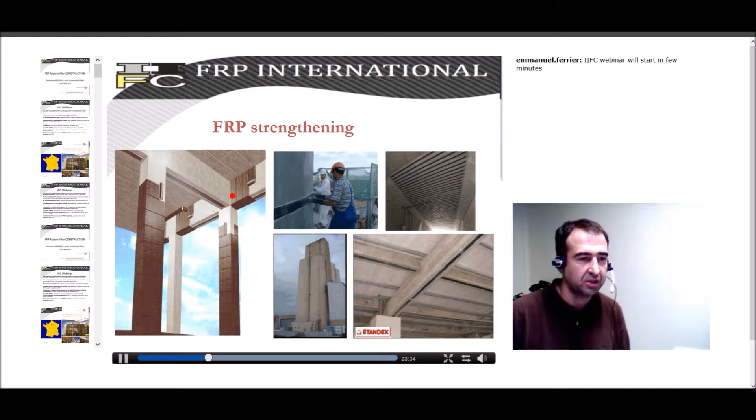So to start with FRP, I think we have a small community today. You are all aware about FRP systems used for shear strengthening, flexural strengthening, confinement. These materials are well known in the field of construction nowadays, essentially to protect old structures or to upgrade structures that need new strengthening because of overloading. It can also be used to solve some problems about design mistakes, for example. And for seismic applications, there is also good application to make structures more safe.

In France, for example, we have had some interesting developments about dynamic loading on bridge piers that are impacted by big heavy trucks, and a lot of piers have been strengthened by FRP to avoid the collapse of the bridge, quite successfully.

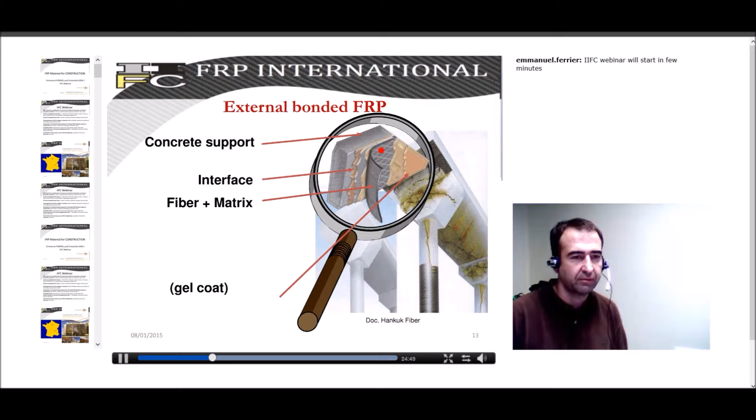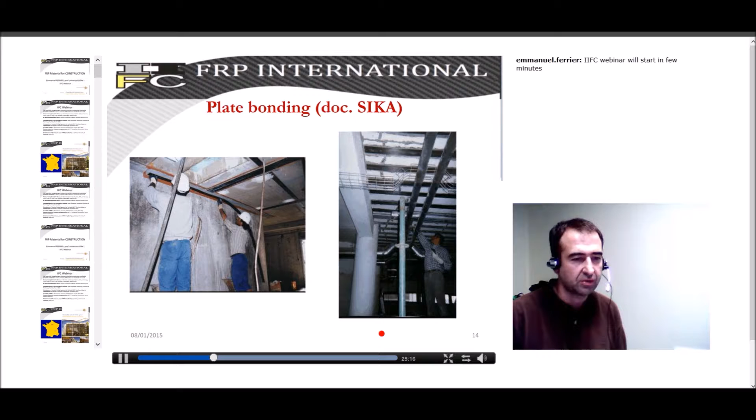So generally when we use FRP, it's unidirectional fibers bonded onto a support using a polymer, but I think you are aware of this. This technique is well used in a lot of countries, and in France there are about 7 to 8 companies that apply about 50,000 square meters of carbon fibers each year, essentially in buildings and a few applications also on large dams and bridges. We have some photos about this kind of application, some large machines to apply the polymer, and so on. So this is just an example from France.

So about FRP materials, I will try to go quickly on this part because there are not so many people connected.

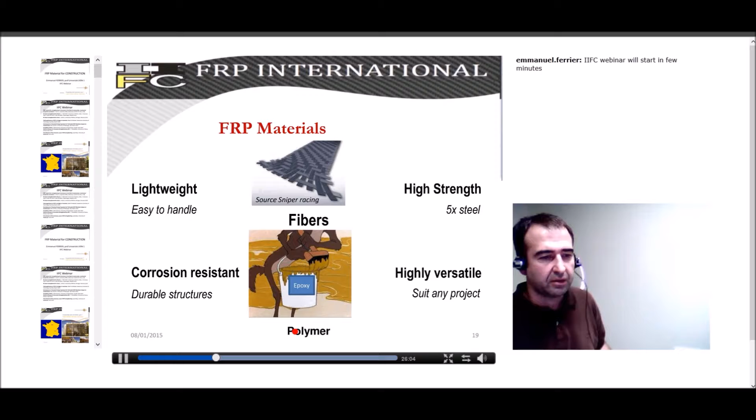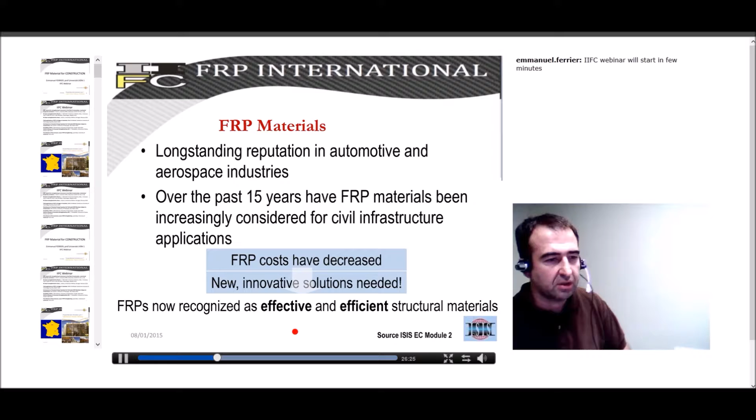You all know that FRP materials are light, high strength, corrosion resistant, and can be used nearly on all surfaces. That makes this material very useful in the field of concrete structures. These materials are well known in other industries, such as automotive and aerospace, and the development of this material has increased each year for about 15 to 20 years, and now it's quite common in construction.

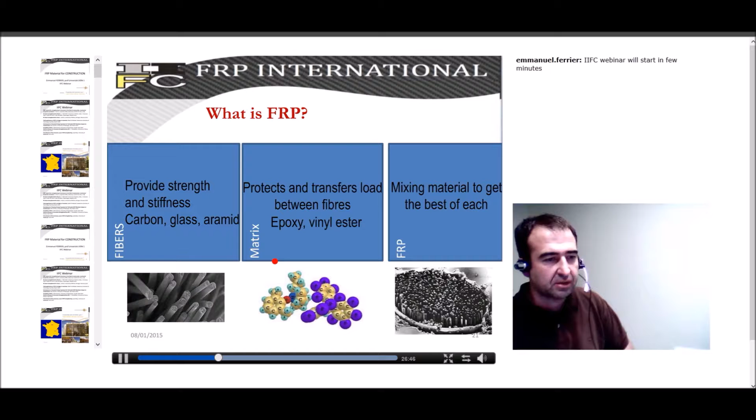FRP material is made of fibers, mainly carbon, because people started with these fibers, but also glass and a few examples with aramid fibers. The matrix is essentially epoxy, and the material you get has a lot of small fibers that play the same role as steel rebars, but with lighter properties.

So about the fibers, you may be well aware that high modulus or high strength carbon fibers are commonly used. Generally, if we compare this to steel properties, the main issue is that we have higher tensile strength but lower Young's modulus. For this reason, the first fibers commonly used were low modulus carbon fibers.

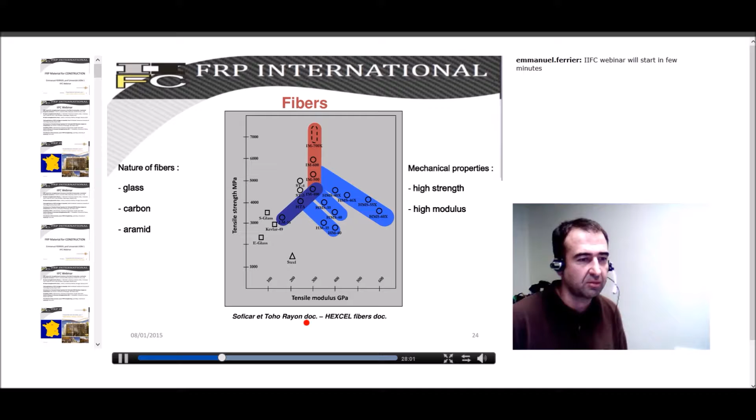Nowadays, for some specific applications, e-glass, even though its Young's modulus is lower than steel, seems to be quite good to dissipate more energy, and we'll see this in some large applications about seismic retrofitting, for example.

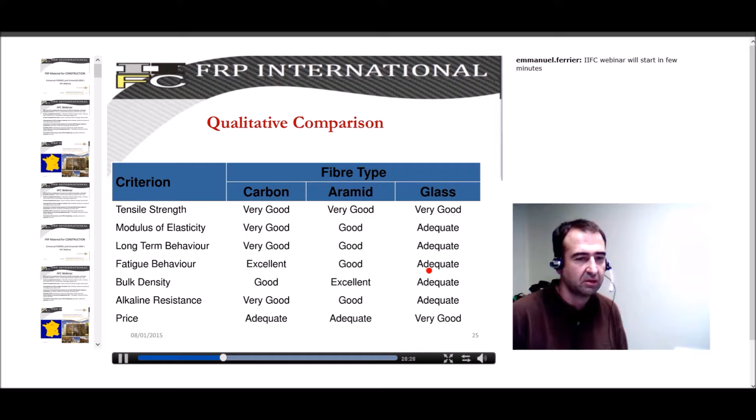If we look at these three kinds of fibers - carbon, aramid, and glass - carbon has very good properties for all the mechanical and physical properties we may look at. Glass is also good, but the problem is the low Young's modulus of this material, and the long term creep sensitivity and fatigue, which is less effective than carbon.

So about the polymer we use - polymer is a specific material well known in the chemistry industry, but generally in our field it's less known. A lot of misunderstanding happens because polymer needs to be handled very carefully and specifically. There is a polymerization process that should be clearly understood. It's like concrete - we need some days, specific temperature, and specific humidity to get the perfect chemical reaction and get the good material at the end.

The main typical property people need to understand is the temperature sensitivity of this material. If we compare this to concrete, we know that concrete is fully strong and fully hard once we mix cement and water, and the mechanical properties don't really depend on temperature. In this specific case, temperature changes the mechanical properties of the polymer.

You have a range of temperature where the polymer is thermoset, with a glassy plateau where the mechanical properties, essentially Young's modulus, are constant. Then there is a decrease, down to the rubbery plateau where the properties still exist but are very low, much lower than the initial one.

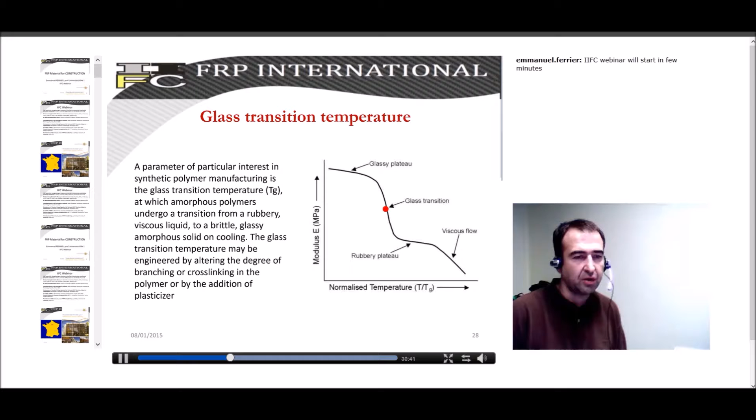This may be compared to the material used, for example, to build a road - material coming from the petroleum industry - and it behaves in different ways depending on the temperature. So we identify a value which is the glass transition temperature of the polymer, corresponding to the value where the mechanical properties decrease.

So a common thermoset polymer used in our industry is epoxy, used for wet layup applications of laminates and dry fibers. It's a very good material for adhesion and bonding. We'll see this in the second part.

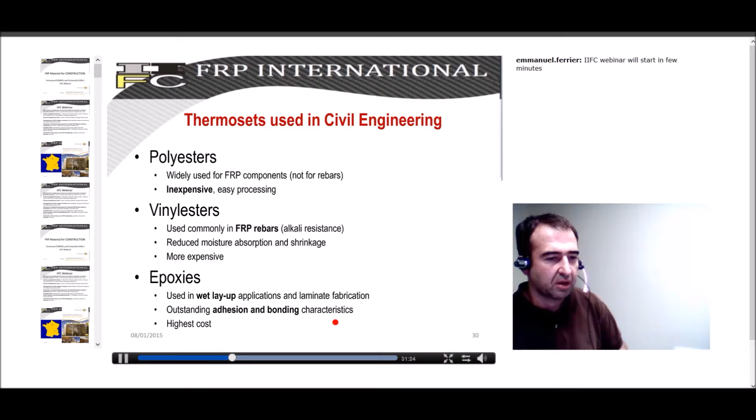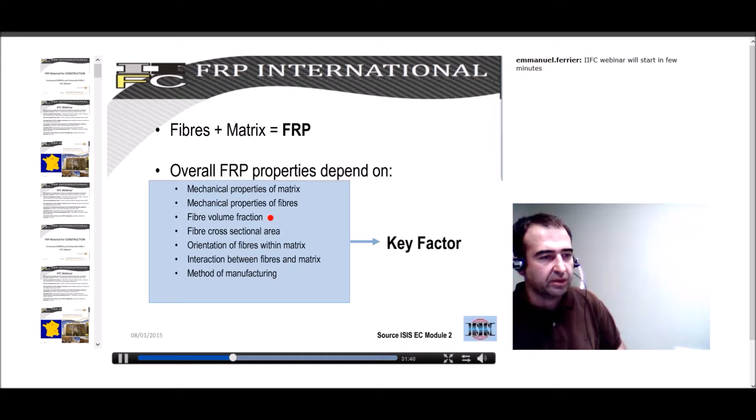So FRP is a mix of fibers and matrix, and the mechanical properties of FRP will depend on the matrix, as I mentioned, on the fibers, but also on the amount of fibers in the mix and the adhesion. So if we look at the mechanical properties, you have to understand that the mechanical properties of UD fibers are given, and you can have very good properties of fibers.

Then you will have two things to understand - the fibers are bound together, so there's the problem of physical and chemistry properties of the surface and the interface between the fibers and the polymer. And then you have the laminate, meaning you will have a lot of layers, and all those layers have to bond together perfectly.

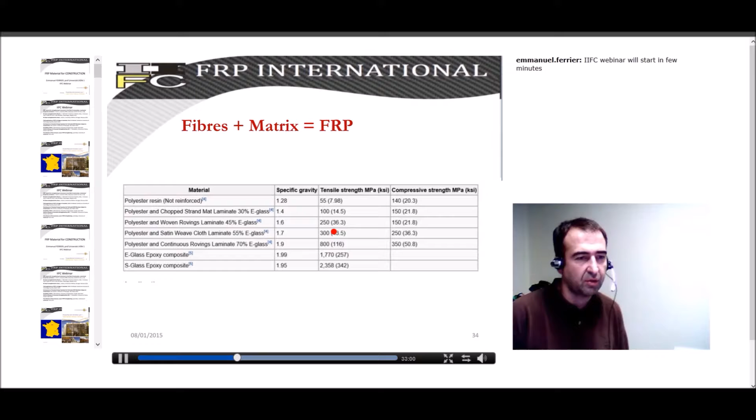If we go to the mechanical properties of the resin, you can observe that generally the laminates and the mechanical properties of the FRPs essentially depend on the mechanical properties of the fibers themselves. It means that polymers are just there to make sure that all the fibers are bound together and that all the fibers work at the same time in tension.

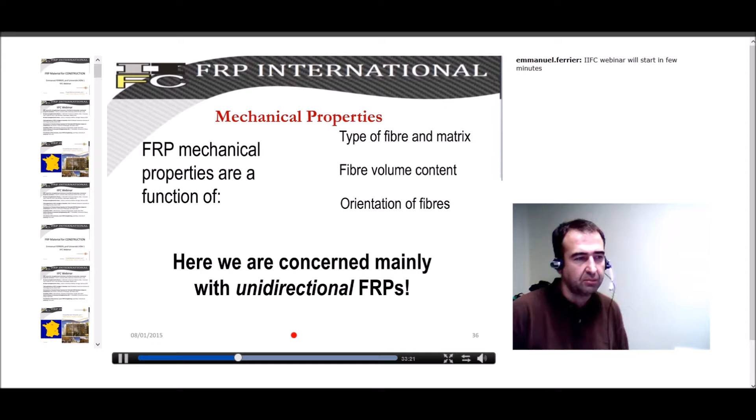So those materials are applied by the wet layup method. Dry fibers are bound onto the substrate, and an epoxy polymer is used to impregnate the fibers. It can also be bound using polymers.

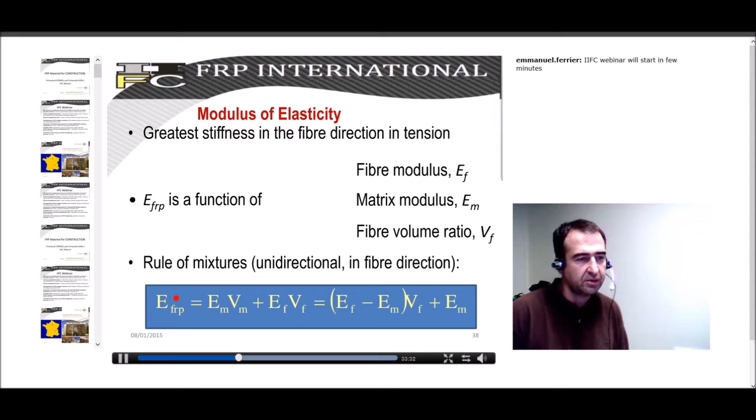About properties, as I mentioned, the Young modulus can be easily calculated using mixture properties. It means that your final properties will depend on the matrix properties and the fiber properties. If we compare the Young modulus of the matrix and the fibers, even if we have 70% of the FRP made of matrix, the mechanical properties will essentially depend on this ratio. Carbon, for example, has a Young modulus nearby 200,000 megapascal, compared to a usual epoxy which is only 3,000 megapascal, so the difference is nearby 100. So the mechanical properties of your FRP will depend on this value. If your ratio is very low, your final properties will be very low.

When we have this, generally we identify the mechanical properties using perfect bonding between the fibers and the matrix. This is not often the case, so there is some problem in certain cases between matrix and fibers. This is well known and identified, and it's quite common now to get a very specific treatment of the fibers so that there is very perfect bonding between these two, allowing mechanical properties to be calculated considering usual elastic properties of all the constituents.

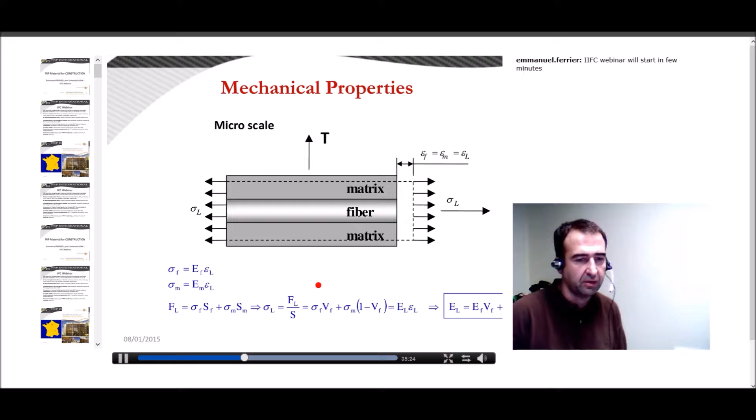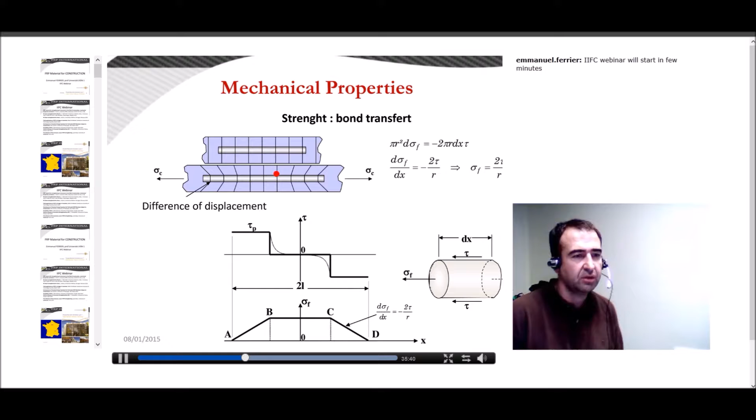Then about shear: when a fiber is fully impregnated by the matrix, there will be a bond issue between fibers, and there is a strength property to identify, which is the shear strength that can be developed around fibers to make sure that two layers will be fully bonded.

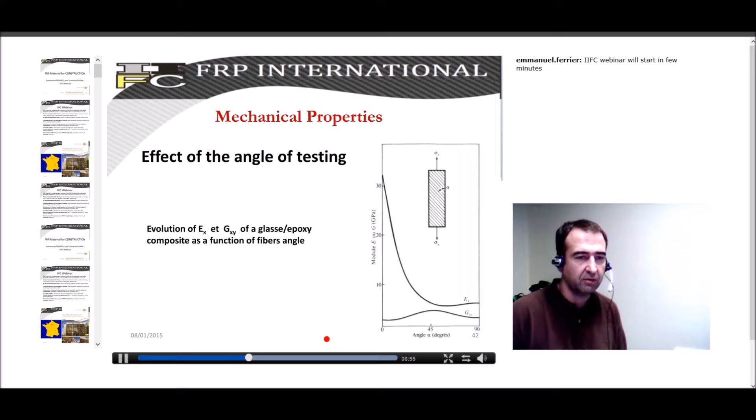Another thing well known in this field is that when we use unidirectional FRP material and test it in another direction, we rapidly lose the mechanical strength even for a very low angle. The decrease in Young modulus or strength is very high, so this material should only be used in its own direction and not in another direction, which can be a problem mainly for a full FRP system. But in case of strengthening, generally the fibers are bound in the direction where the force is applied.

To sum up the mechanical properties, here is the stress-strain relation in tension of fibers and matrix - I mentioned there is a big difference. If you clearly observe, the FRP material will have final properties that depend on the amount of fibers and matrix you put in, as well as the initial properties of both.

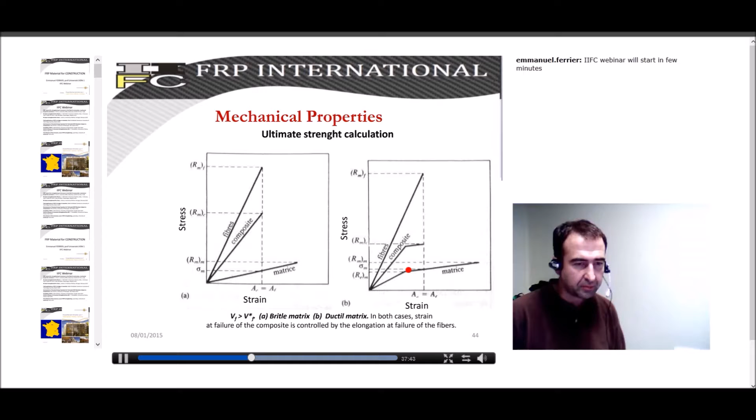For nonlinear behavior, some development has been done in this field recently. This can be obtained depending on the matrix properties, but also on mixing fibers with different behavior.

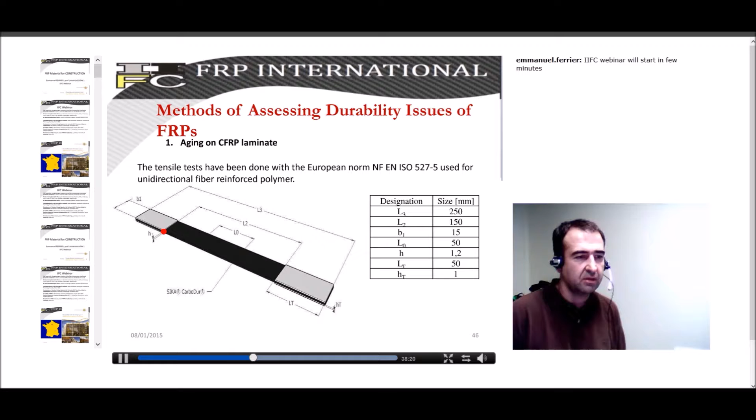For testing material in our field in construction, it's quite well identified now. Generally everybody uses the ISO norm for tensile testing. There is also an ASTM standard, which is a little bit different in sizing but quite similar in principle. Coupons are made of unidirectional material, and then it is tested directly in tension.

Some people ask about the durability issue of these materials, and this is a result coming from our lab testing. We got questions about FRP durability from the French nuclear agency, EDF, who were wondering about using this material for strengthening big buildings and chimneys in nuclear power stations. They asked us to make some tests under quite difficult weather conditions.

At first there is full water immersion during 30 minutes, then freezing at about -20 degrees for an hour, then heating to 60 Celsius degrees, then UV exposure, then rain again, cold, heating with moisture, dry heating, repeated for 300 cycles. This is, I think, the only norm I found about accelerated testing of material. It is commonly used to test painting material, and we have used this for several FRP materials.

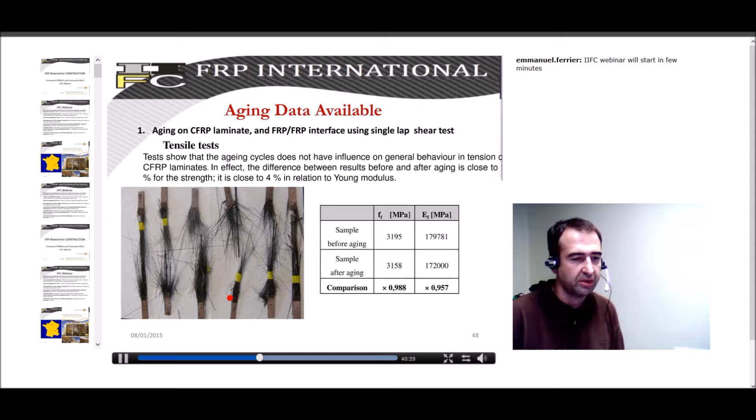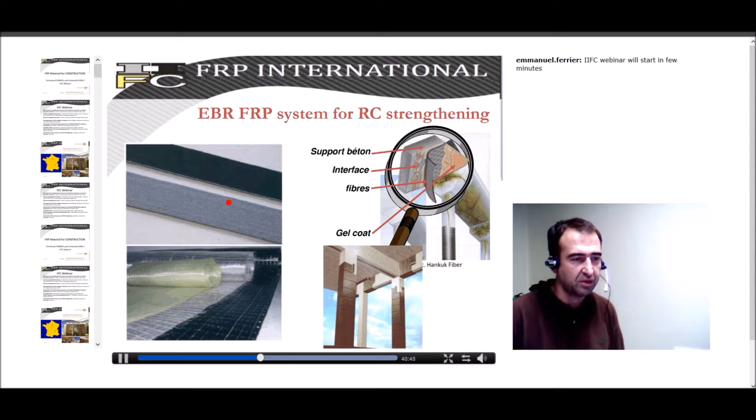What we found is that if we compare the ultimate strength and the ultimate Young modulus, we didn't find any modifications on the coupons we tested in the lab. We made about 100 tests and didn't notice any difference between before and after the aging, and the aging conditions were quite difficult. Brahim Benmokrane will introduce some durability issues about this, and we are quite confident on the durability of the FRP itself. But as I mentioned, this material is bonded onto a support, and generally it can be bonded with two types of material: laminate material, prefabricated, or different sheets directly bonded onto the support.

So now the issue is not only to test the material, but to evaluate how it behaves depending on the way the material is applied on the support, the way the worker applies this material, and the weather conditions. We are worrying about how to identify the mechanical properties of the FRP onto the concrete.

This is the next step of my presentation, about the bond issue. Bond is important for a beam because when you strengthen a beam with FRP for flexure, this can only work if perfect bond adhesion between the FRP system and reinforced concrete is assumed. That means you have continuity of strain between the steel and the FRP. Another important issue is that at the end of the FRP system there should be no debonding, because even if perfect bonding can be assumed in the current part, if there is debonding of the laminate the system won't work anymore. So the bond issue onto the concrete substrate is very important.

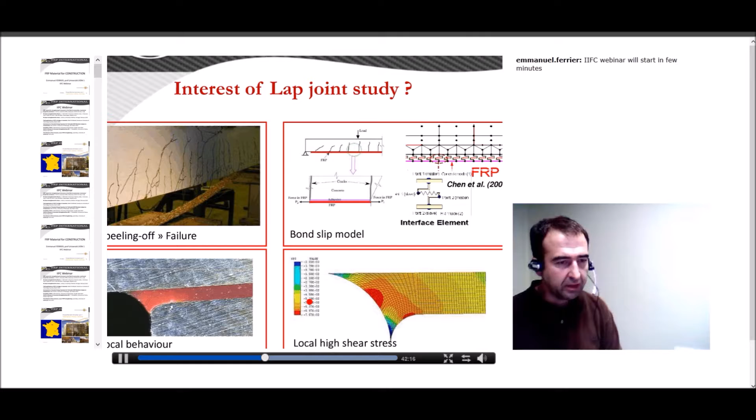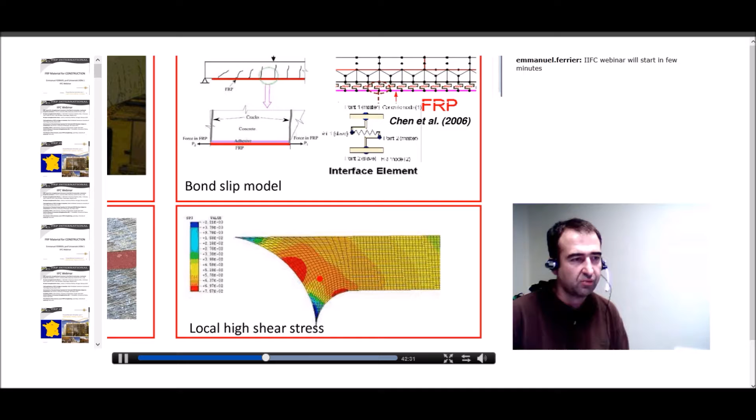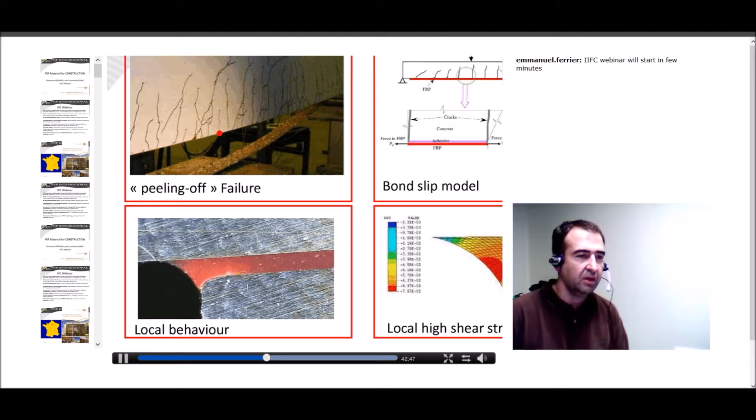There has been a lot of development about this. This comes from the aeronautic industry and mechanical research - we know that at the end of a lap joint there is important stress, essentially because we have two different materials bonded together with different mechanical properties. This image shows that shear is the main issue and the main problem, and this shear, generally in reinforced concrete beams, is known to cause full delamination or peeling off of the structures.

In order to identify this, there has been a lot of development and modeling to try to understand how this interface behaves and to identify its mechanical properties. This is the next step of my presentation - I will try to show you how researchers have tried to find and identify the mechanical properties of this interface.

Since 1992, the first research developed a compressive shear test. This test has completely disappeared - we don't find it anymore. There is also a single lap shear test, which is quite commonly used, but it's difficult to apply in certain cases because you can have flexural behavior, and the mechanical properties are difficult to obtain.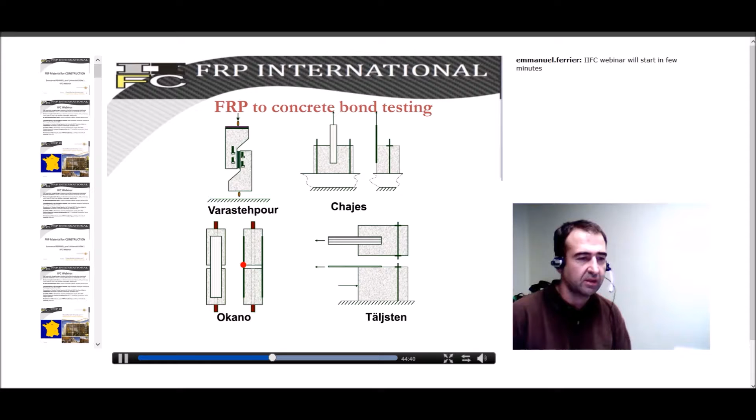Another common test is the double lap shear test. Two concrete blocks are connected by FRP material. Then tensile stress is applied onto the concrete, and due to the tensile force developed in the FRP, you get shear developing in the interface. The first authors to use this test were Okano in 1995 - quite a long time ago - and this kind of test has been fully used by other authors since.

If you look at the results obtained with this kind of test, you have the average shear stress developed all along the bonding length, and here the strain in the FRP. As you observe, there is quite a linear behavior, then debonding starts, and full failure is obtained.

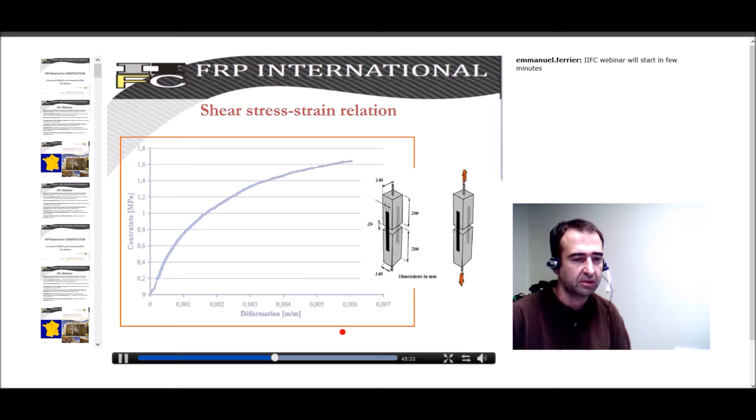Going back to the literature review, the first tests reported in papers were from Täljsten in 1997. This was the single lap shear test I mentioned, and the test was developed for FRP bonding but also for steel bonding, since at that time steel plates were still used for reinforced concrete strengthening.

If we bond strain gauges onto the surface and follow how the force is transferred from FRP to concrete, this author showed - and this is now quite commonly known - that depending on the level of load applied, you get a transfer length which is quite short. You can observe that nearby 100 to 200 millimeters is enough to transfer the full stress from the FRP to the concrete. This graph shows that at the beginning of the lap joint there is important strain, which decreases as the stress is transferred to the concrete support, becoming nil at the end.

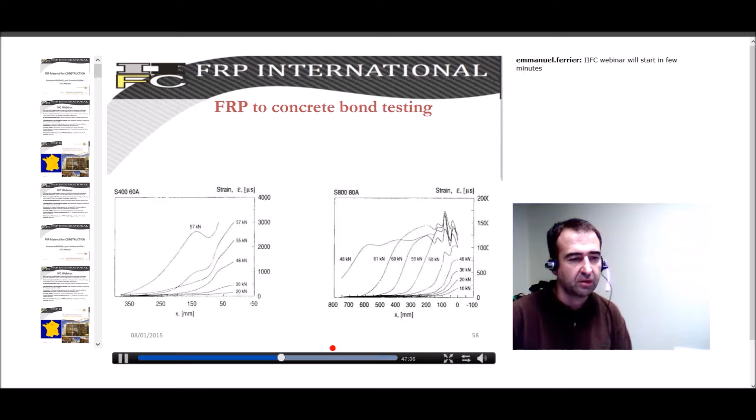You can observe the author captured debonding here, where full stress was developed and this zone is debonded, leading to failure. But in the elastic stage, the bonding length is not so long - we only need 100 to 200 millimeters to bond this material onto the support. This is mainly due to shear transfer.

There are also some old studies done mainly in the field of aeronautics, with authors like Volkersen or Hart-Smith.

Using a basic equation, shear is due to the difference of displacement between two materials, steel and concrete, for example, and the angle of rotation is commonly known as the shear strain. You can write these equations and equilibrium between two sections, and this allows you to calculate the shear stress depending on the length.

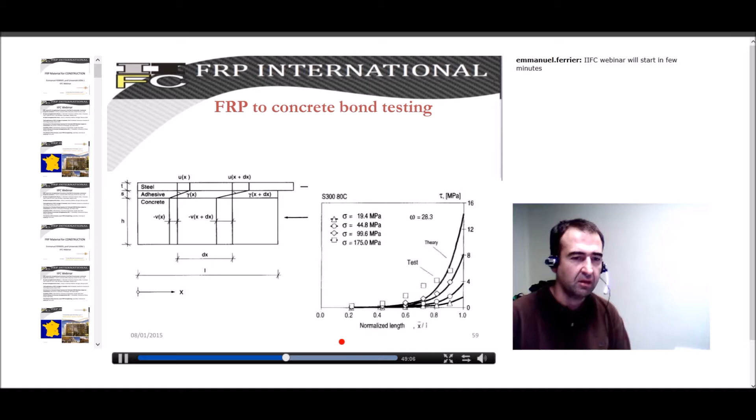If you do this calculation and compare it to the strain, it's very well developed in the field, in the paper from Täljsten. You can observe a very important shear stress decrease over just a few centimeters of bonding. This is also a problem because locally you have peak stress, important stress that can create specific mechanical disorder leading to failure.

This work done by Hart-Smith was developed further by Täljsten for the concrete FRP problem. Bizindavyi also worked on it, and a lot of specific equations have been developed on this topic. You can find them in the literature review quite easily.

More recently, other authors worked on very local bond slip mechanical laws. All these authors have shown that if you focus your study on the peak stress area, you can show, based on experimental study, that the bond stress against slip follows this kind of nonlinear law, with a decrease corresponding to the beginning of debonding.

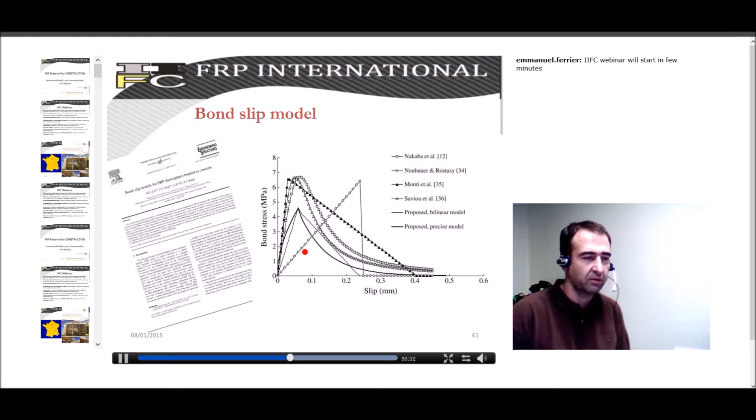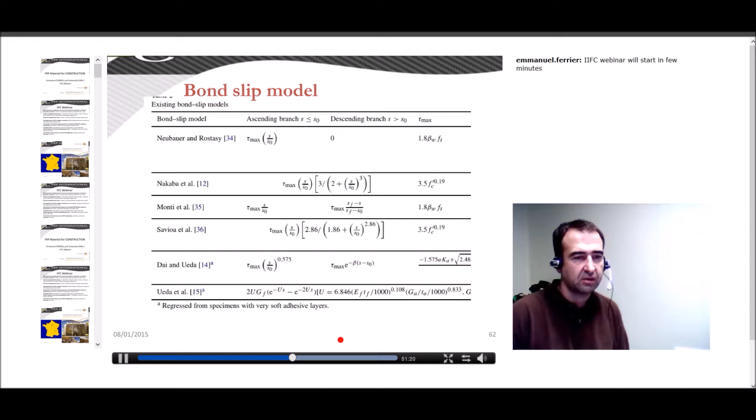Depending on the authors, you will find several proposals, and I've summed this up in this paper. This paper sums up all the equations proposed by different authors, and they have clearly observed that the maximal value can depend on the concrete strength. Based on this, they have proposed mechanical relations to calculate the ultimate load needed to design such bonding properties.

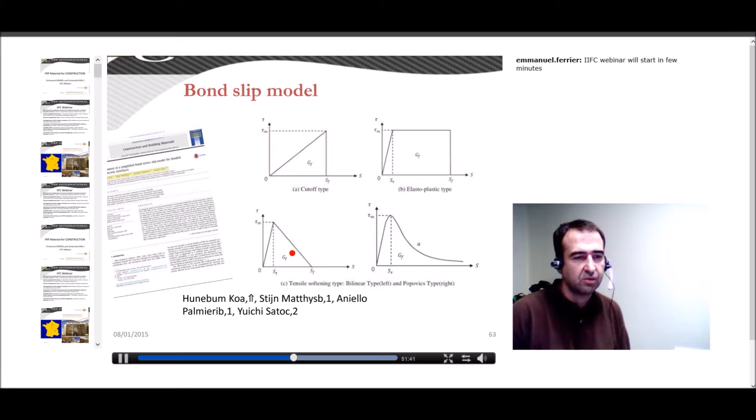So depending on the design, there are several mechanical laws. Generally this value is correctly assumed, and the G factor is also proposed in several papers, so that you have some bond slip model that can be used afterward.

A comparison has been done by Stijn Matthys and Aniello. This study is very interesting because it compares a lot of tests. If you need to develop bonding issues, I recommend reading this paper, as it has many results from the literature, comparing calculated ultimate values to experimental ones, clearly showing the calibrated models are quite good, depending on the test and the fitting you get.

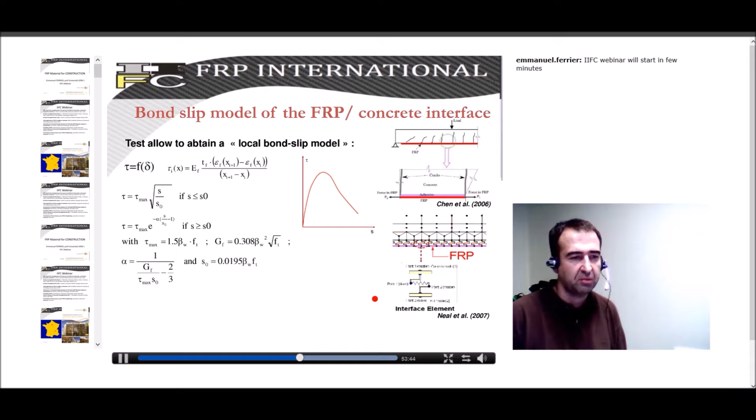Then, using these properties, Shalal and Chen, also Kenneth Neal at the University of Sherbrooke, tried to use this kind of local bond slip model in structural analysis. For FRP interface behavior, you need specific interface relations, and the calibrated relations from the literature have been used to investigate whether this bonding issue can be modeled at the structural level to capture the problem of failure, which is important for beam strengthening. Both of these papers are very interesting.

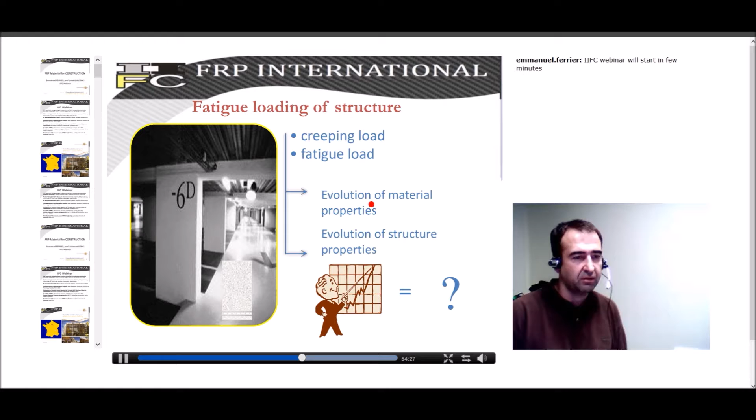So now we've seen that under static load, this bonding problem is quite well identified. There have also been many studies on creep behavior and fatigue issues. When you strengthen a building, such as a parking slab, there will be creeping load and also fatigue load due to cars. The main problem for engineers is the evolution of material properties, and whether the evolution of bonding will affect the structural behavior.

So, for example, I did this work during my PhD some years ago. We tested concrete blocks in shear for 1 million cycles. The fatigue load was applied between 50% and 10% of the failure load for 1 million cycles. This test is the double lap shear test that I described before.

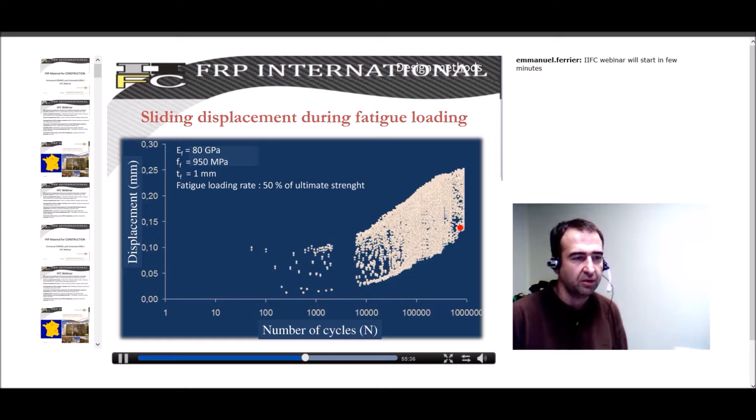You can observe the results here. Depending on the level of strength, there is quite slight, no real evolution of the mechanical properties up to 10,000 cycles, then there is a slight increase of the slip. The slip keeps increasing, but even so, we didn't get failure of the concrete. When the test was done after 1 million cycles, we then applied the static loading. This picture is quite old.

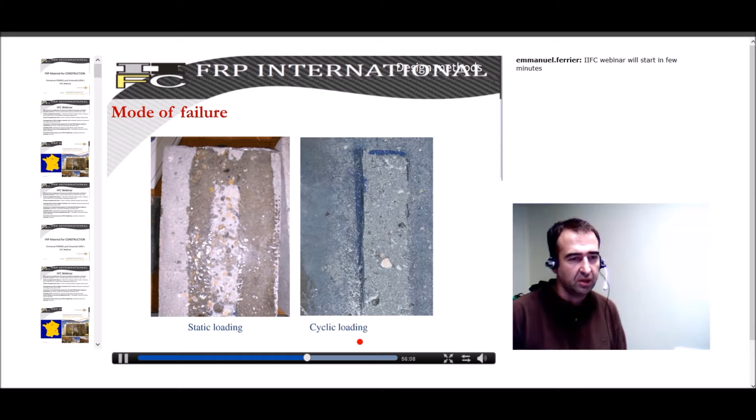What we observe is that we have some decrease in properties in the adhesive because the failure modes change between a cohesive and a non-cohesive failure. This was very interesting for us to see the mechanical decrease and the fatigue.

Since then, there have been other studies done. I can mention, for example, this one from 2008, on fatigue behavior of blocks connected by an anchorage system. This is clearly a very interesting paper because they tested several systems: only bonded system, small anchor system, mesh, fibrous anchors, and also bond straps onto the surface.

Those authors tested all these configurations and also observed an increase in the slip, as I mentioned first, and they also saw that there is a slight decrease.

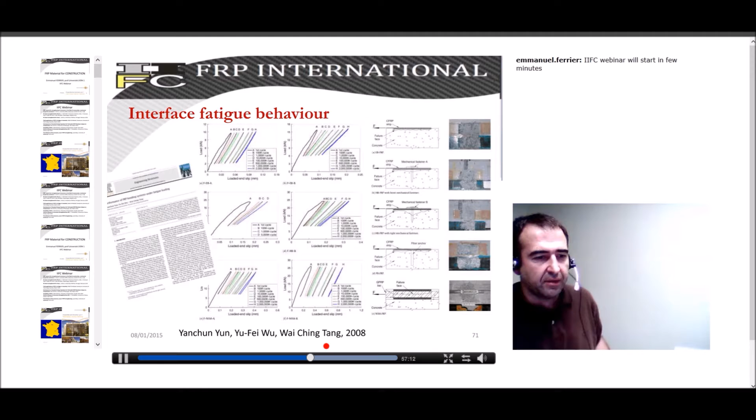So this study is also very interesting if you are interested in the fatigue behavior of the adhesive. At the end, when fatigue is concerned, what we are interested in is getting the ultimate stress strength of the material depending on the number of cycles. For designers and engineers, this value is interesting to know what the limit of stress should be on the FRP to avoid any fatigue debonding.

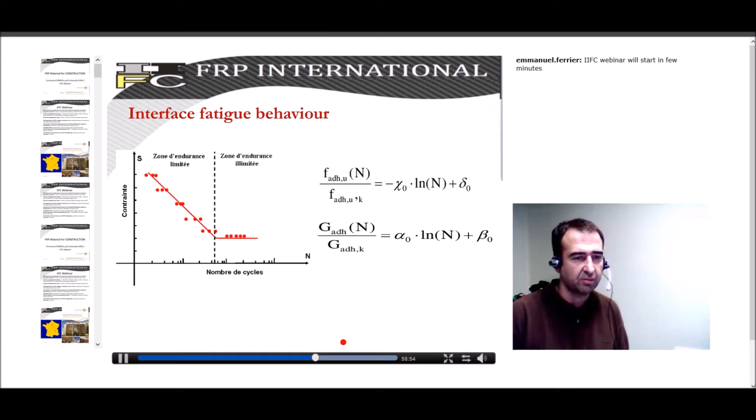In literature, you have some equations such as this one, like Wöhler curves, that propose some constants, of course depending on the process and the system you are studying. There isn't so much, but there is some proposal allowing us to know about the fatigue behavior.

Then the second issue which is interesting to focus on is the creep issue. This was part of my work done during my thesis. At that time, we were interested in getting the full master curve of an adhesive using the time-temperature principle, basically based on the Williams-Landel-Ferry hypothesis.

It is possible to get the full creeping relation using short-term tests with different temperatures. The idea here is that during a short period, a temperature gives you a creeping curve. If you increase the temperature, you will accelerate the creeping problem, and then the creep will increase. When you increase the temperature again, you can get several curves.

Those authors, in the 1950s, showed that it's possible, if you translate all of those single curves, to have the full master curve of a polymer for a reference temperature.

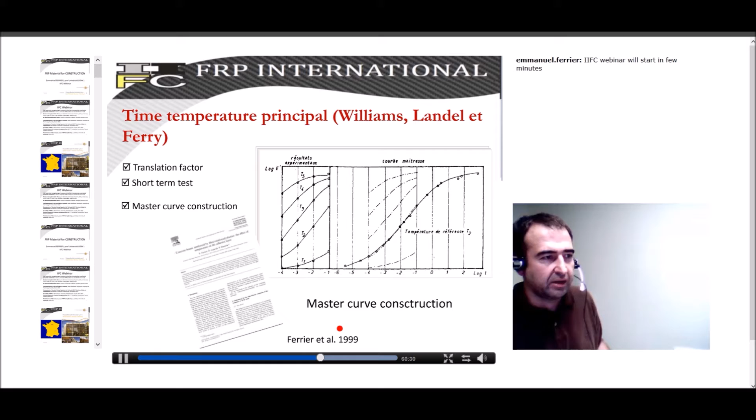So we used this idea on lap joints made of epoxy polymer and carbon fibers. You have here all the shear properties of the adhesive that we obtained from 20 Celsius temperature, then 25, 30, 35, and so on, until we get a real decrease of the mechanical properties.

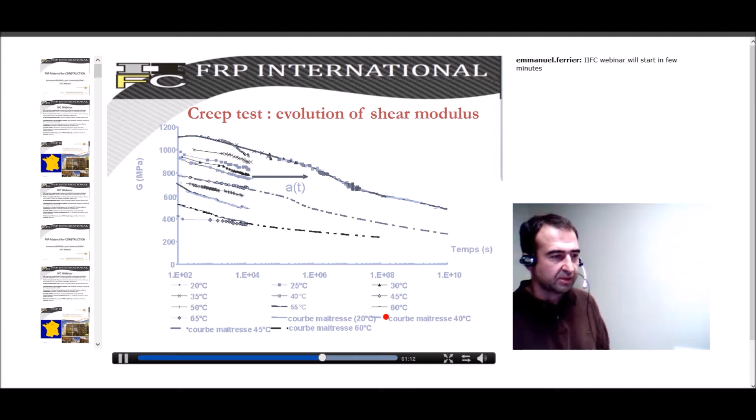Then we translated all of them to get the full evolution of the shear as a function of time. Basically, when you have this, you have the creep function for several temperatures. We compared this with long-term tests, and this has also been published and it works quite well.

What's interesting is that if you use some specific rheological model, you can fit your parameters in comparison with the experimental data we get. Using this, you are able to get the shear strain evolution depending on the initial shear stress and the creep function you have. What we imagine with this is that the creep strain, the shear strain, depends on the instantaneous strain and the creeping one.

It means that if you identify the initial shear strain in the adhesive, if you apply the constant stress, and if you know how this strain will change during time, you are able to fix the maximal value of shear stress you should have in the adhesive to keep your lap joint elastic.

This was the idea to fix an allowable shear strength limit, to get this kind of figures here, depending on time, level of strain, and temperature. You will have the limit in stress you should have in the adhesive, not in the FRP, to avoid nonlinear behavior and keep your adhesive in an elastic stage.

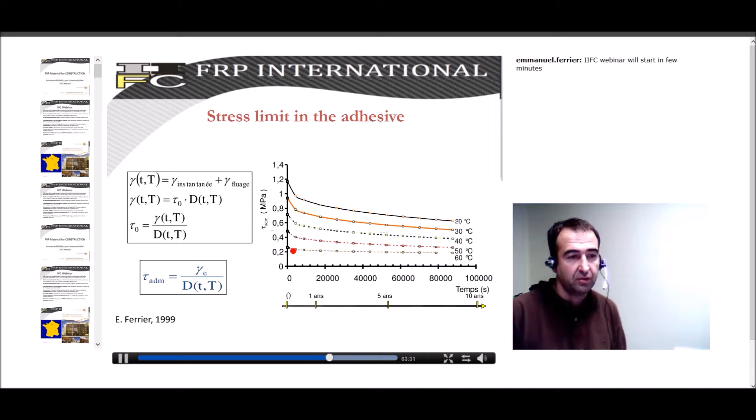If we observe this value, for example at 20 Celsius degrees, our conclusion was that we should limit the serviceability limit stress in the adhesive to 0.7 megapascal, so that we avoid any debonding over a long time period. But if we speak about higher temperatures, you can observe that the limits should be much lower.

What's interesting is that the modeling has been done as I have done, and they have proposed also to try to improve the creeping behavior using nano carbon particles that can be used in several kinds of polymer in the field of aeronautics to improve the creeping behavior. These authors conclude that it can be very interesting to use some new polymer to limit the problem of creep in this adhesive.

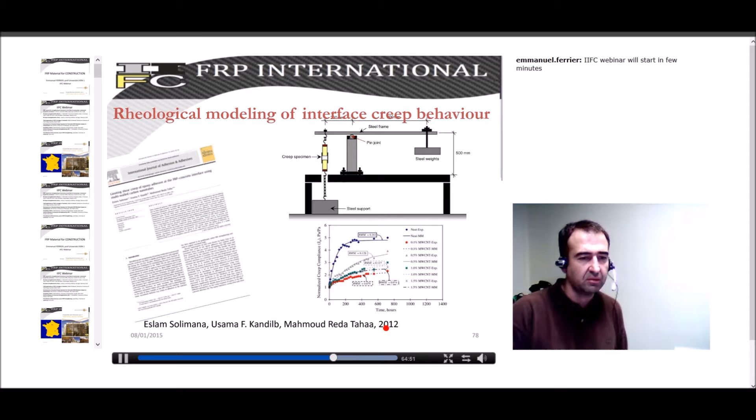So this paper can be very interesting also, and quite a new paper. The problem that we found is that temperature dependency is quite important when we look at the problem of creep. More recently, two years ago, we have started to combine the problem of thermal properties dependency and the problem of loading.

It means that the adhesive is sensitive to temperature. Shear modulus decreases and there is a change in shear strength. Due to change in temperature, this can induce displacements between concrete, FRP and adhesive, because all those materials don't have the same thermal expansion factor. This may induce internal stresses and some additional shear stress that have not been studied.

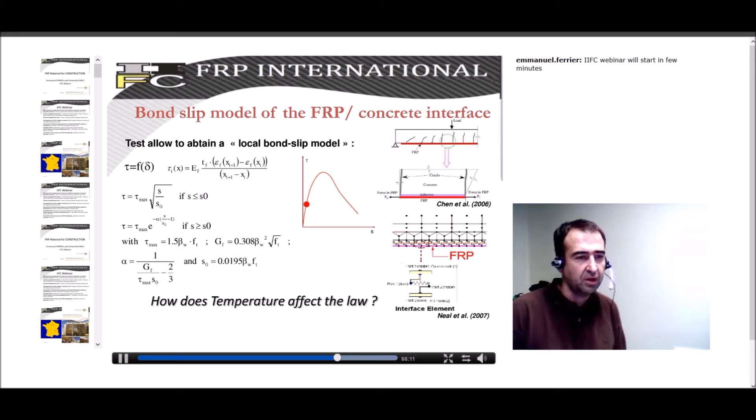So what we have done is try to identify how this affects the local bond slip model I mentioned before. How does temperature affect this? I mean, all the proposed equations I mentioned before, are they only good at 20 Celsius temperature, or are they good for any current temperature?

This study is very recent. I presented it at the CICE conference in Vancouver last summer. What we have done is combine stress and, in a heating chamber, temperature. We have tested about 50 samples with different temperature conditions, and we have tested two different FRP systems. To identify the way that strain decreases along the bonding length, we have bonded several strain gauges, allowing us to get the full strain in the FRP and then the load transfer.

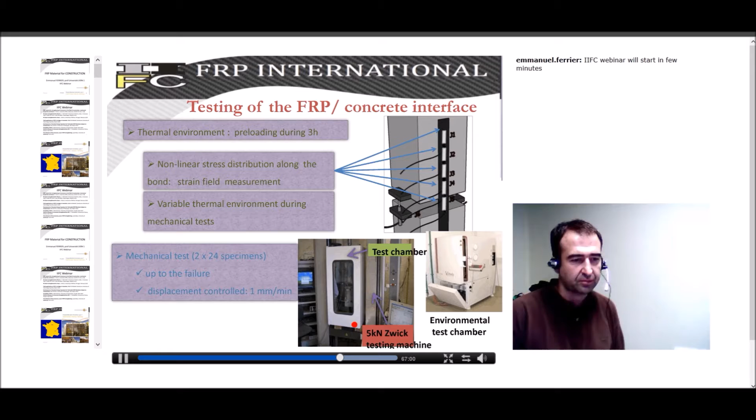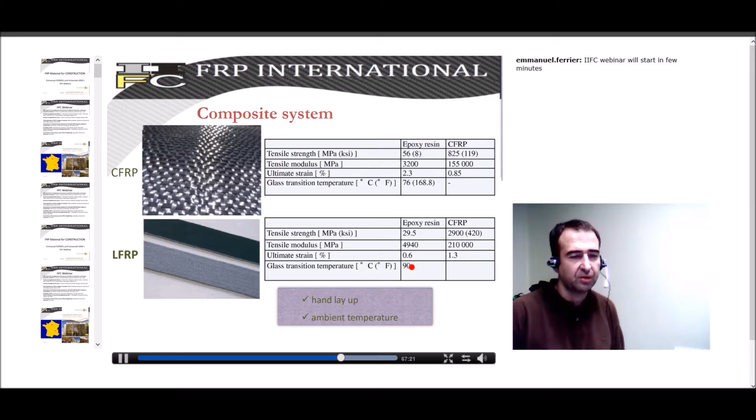In this study, a wet layup system has been used with carbon fibers, and laminates were bonded onto the surface. Two different properties were tested. This one has a quite high glass transition temperature, which was very interesting in this study.

Here is an example of results obtained, for example, by laminate. You have here load and full displacement obtained with the wet layup method. In this case, you can observe that from 0, -10, -40, to 20 Celsius, 40, between -40 to +40, there is nearly no change in mechanical properties. There is a slight increase of stiffness for very low temperature and a slight decrease in strength, but not so much change.

But when you reach 60 Celsius degrees, remember that the glass transition temperature is about 75 for this polymer, the decrease starts. Then at 80 Celsius degrees, you have a very important decrease with non-linear behavior, mainly depending on the FRP. Same observation with laminates, though the temperature was higher. You can observe here that we start to get an important decrease at only 100 and 110 Celsius degrees.

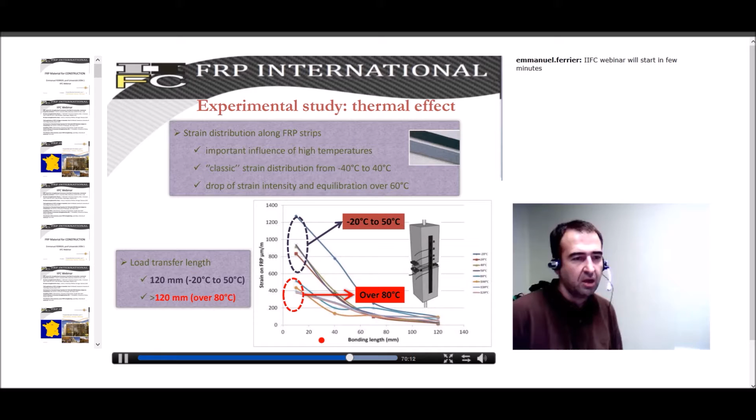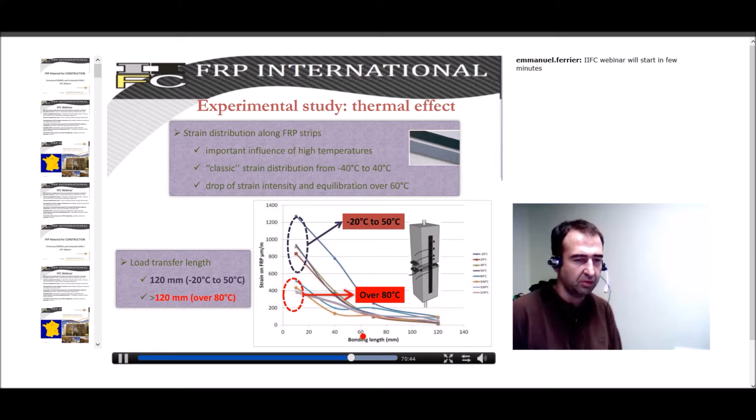So the load transfer length is changed and depends on the temperature, which is quite new, because all the equations basically have been developed for a constant value of transfer length. For the other system, the same observation can be made with different values. You can see that very low temperature increases the strain very locally. This may explain that we get some initial internal strain that allows maybe creating some debonding before the loading. And then the behavior becomes very smooth when we increase the temperature, nearby the glass transition - we are below it, but very nearby this value.

So temperature modifies the local bond slip model. That is our main conclusion and main issue about this, because the local bond slip model essentially depends on the strain profile you have.

About the failure mode, here you have one at -30. You can see that the system, all the concrete blocks are frozen. The test was done with temperature and loading applied at the same time.

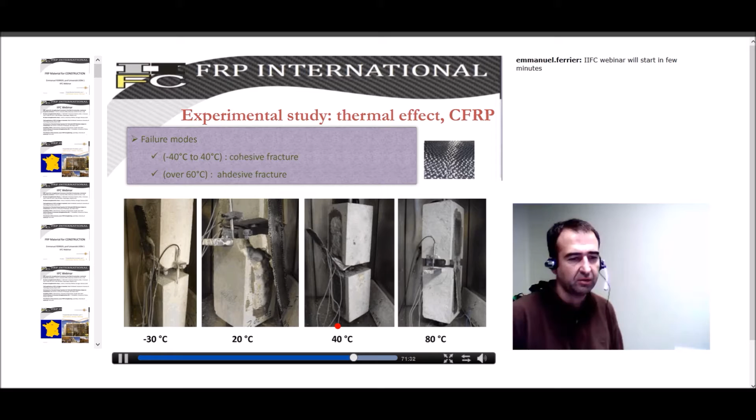So it was in a thermal chamber. When the temperature increased, we get a very non-cohesive failure with full debonding of the FRP system. Same observation with laminate: cohesive failure, then non-cohesive failure at 120 Celsius degrees. So the main parameters that should be modified to consider the temperature effect are the GF value, the value of beta depending on the bonding length, and also the factor alpha.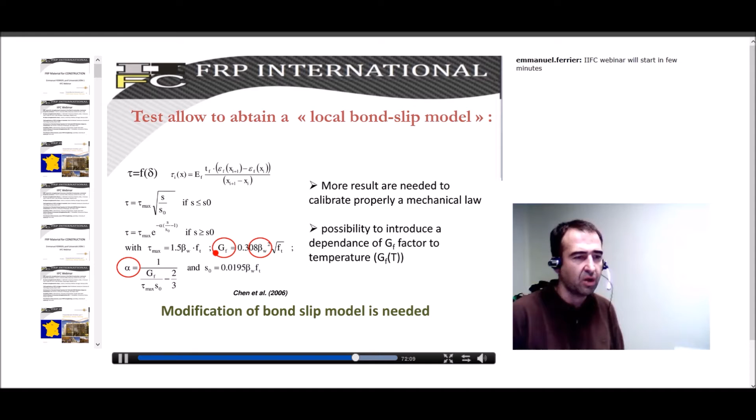So these works done are quite new for us, and now we are working to try to build a new model to introduce the temperature effect in the bonding.

In fact, if we don't do this, you can see here, for example, one model which works quite well, coming from Yao and the team of Teng. These authors published a model that works very well.

And when you observe this, you can see that for low temperature, the values at failure are overestimated, which can be quite dangerous. For common temperature ranging from 0 to 40 Celsius degrees, it's quite good. But since we increase the temperature, for very low temperature, 60 is not so high, the previous calculated value is very far from the results.

And the same is for laminate. Laminate is good at 20 Celsius degrees, and the model is calibrated for this value. But for low temperature it's not good, and for high temperature it's not good either.

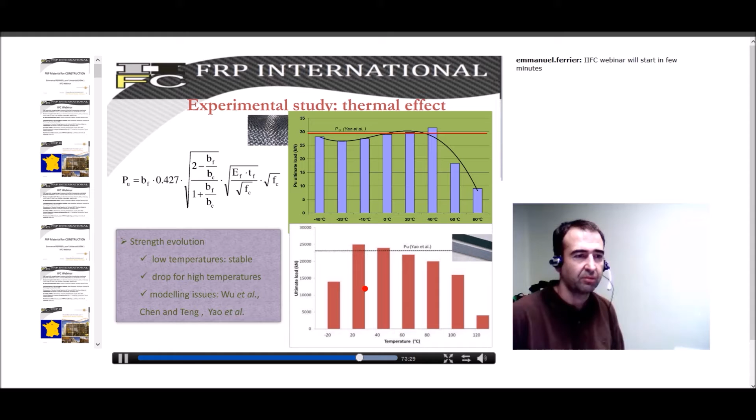So this is an important problem because we can have low temperature and load for bridges and other kinds of applications. So we get back to modeling and try to see what existed in the literature. We found a lot of models about bonding issues in the literature, quite old models.

All these models try to introduce temperature in the shear behavior to model the mechanical properties. And if we look, for example, at Hart Smith, a researcher coming from aerospace who worked a lot on bonding problems, he introduced the idea that there can be terms in the shear stress distribution due only to thermal problems.

And also plastic strain due to local debonding. He calibrated all these constant values depending on the variation in temperature, difference in value of thermal expansion factor, and conductivity of the material.

And basically, depending on those calibrated values, if we use his model and try to identify, based on our results, the ultimate load, we can observe that this model doesn't work. It means that when the temperature increases, the ultimate load should be much higher than the one we observe. And if we compare to the obtained results, it's very different.

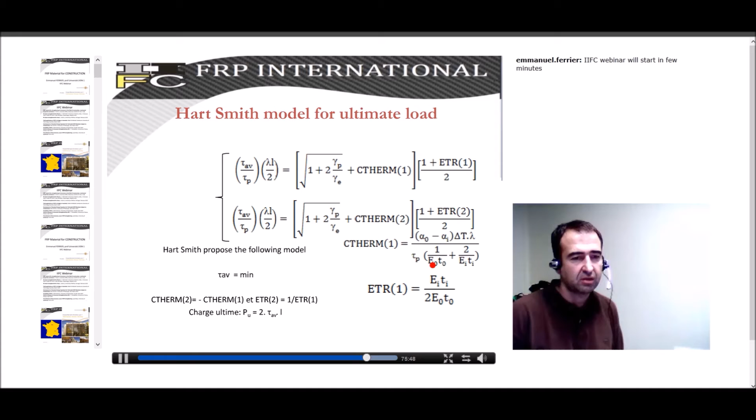In fact, the problem is that Hart Smith worked on thermoset polymer, and the temperature was far from the glass transition temperature. It means all his models were calibrated on the glassy plateau, so it cannot be used in our condition, because in this term you have the Young's modulus of the epoxy polymer, and this value is not constant because it depends on the temperature.

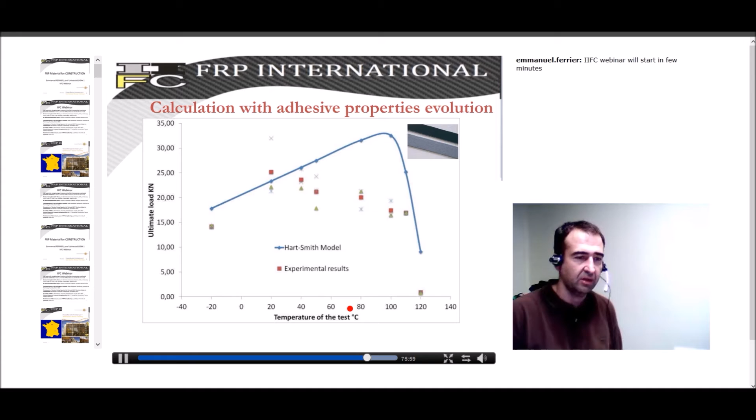So we have done several tests only on epoxy coupons to identify the mechanical properties of epoxy as a function of temperature. And basically, if we correct by introducing a temperature dependency of the factor in the model, the calculated values are more accurate.

The values obtained are very close to the experimental values, and we can even observe that when low temperature is introduced, a decrease in the ultimate load is noted, mainly because there is internal stress in the FRP due to the non-dilatation of the FRP. The thermal expansion factor of FRP is nearby zero, while concrete and epoxy increase in strain due to the change in temperature or the reduction in temperature.

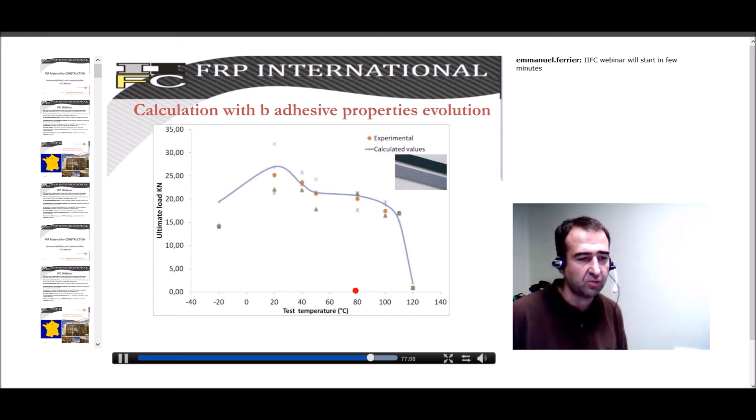And the internal stress in the adhesive creates premature failure. This load is the mechanical load we apply to get the failure of the specimen, not considering the internal stress we have due only to change in temperature.

So at the end, I think we are near the end of the presentation. We have a better view of how to bond these very nice materials onto concrete, and this material is a very nice way to strengthen structures. I think you are now quite confident about it. But otherwise, even if the mechanical properties are well known, there are also other factors.

And to finish, I just want to mention another paper I found quite interesting to outline. You have this paper - I didn't mention, sorry, the authors of this paper, but I can send it by email if some of you wanted it.

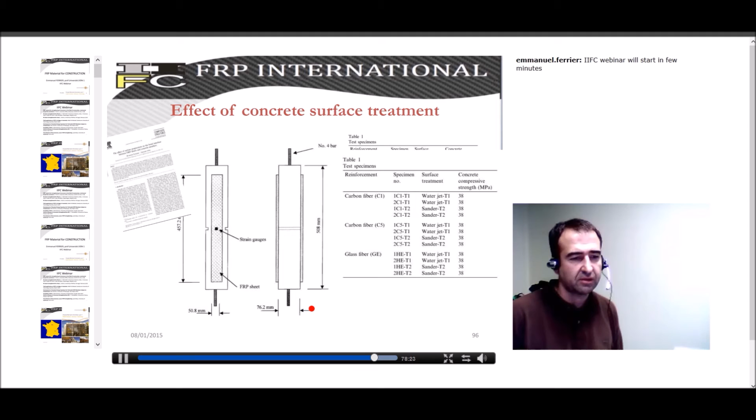As you can observe, it seems that sanding is not the most efficient way to prepare the surface. With the same system, if you use water jet, you can observe that the ultimate stress you have is much

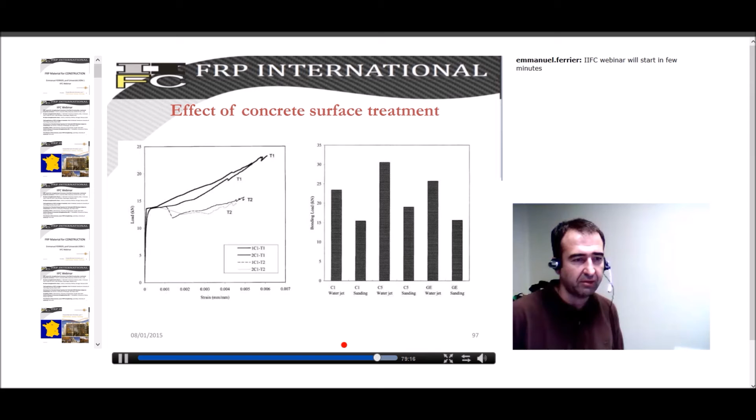higher than the one obtained by only sanding the surface. It means that bonding is more complex than we thought, and the concrete preparation should be looked at very carefully. Maybe such surface preparation should be introduced in the model, because right now, nobody really cares about how the surface is prepared. We need to prepare it, but we don't really know if this affects the ultimate bonding load.

There is another paper that is also very interesting, introducing concrete quality and its porosity. If you have a lot of aggregate and different sizes of aggregates and cement paste, this creates a different surface that has been prepared, and you may have different failure modes and also different failure values.

This paper is very recent and very original, and proposes something new that I didn't know about: aggregate size depending on the ultimate load. This author has shown that the larger the aggregates, the lower the ultimate load at failure you will get, essentially because, as shown in this small graph, depending on the porosity of the surface and the amount of cement paste, the strength of the complex is completely changed.

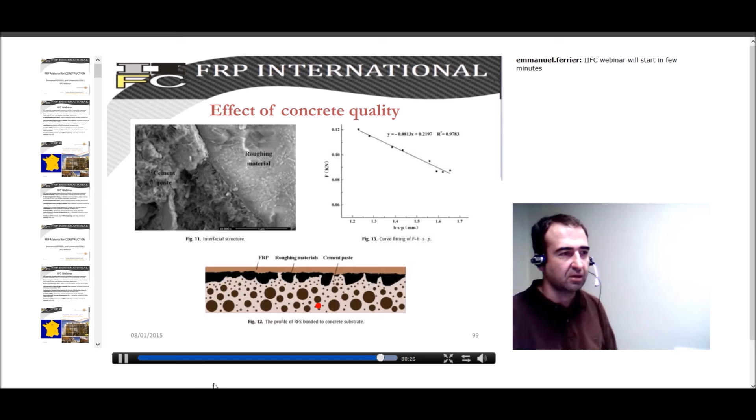So to go to the conclusions, we have shown that FRP materials are efficient, well-known materials. The bond issue is very critical and may need to be studied further, mainly about the concrete substrate. Fatigue, creep, and thermal behavior are already well studied. Some additional research could be done in this field, but we are quite confident regarding fatigue and creep issues.

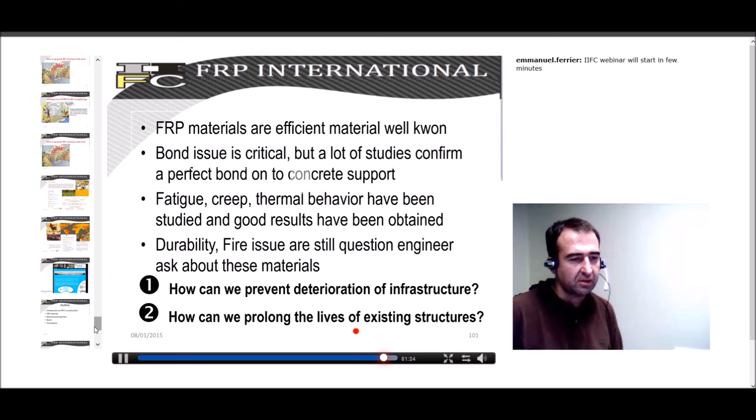Durability and fire issues are always questioned by the engineering field. People are always aware of durability and fire concerns, but the more the material is used in the field, the more confident we become in this area. So the next step is to see how we can strengthen bridges, hoping we don't have such events.